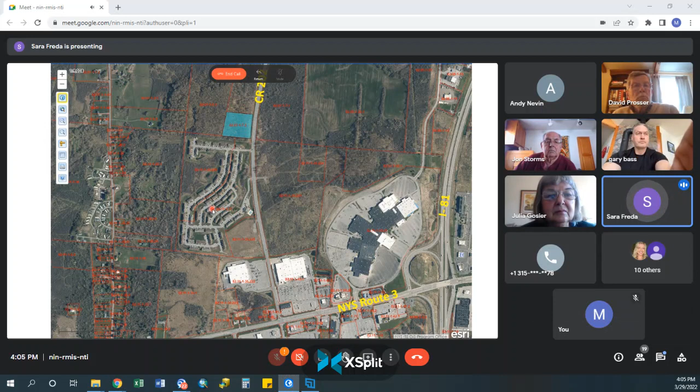Okay, this is a site plan review for a storage facility located on County Route 202 in the Town of Watertown. If you follow my pointer, hopefully it's showing up on that location map. The site is located, here's County Route 202, here's Salmon Run Mall, here's Walmart, Sam's, and Autumn Ridge Apartments. So this site is just north of Autumn Ridge Apartments. The site is zoned neighborhood commercial, which allows storage units with site plan review. And the project is surrounded mostly by vacant land and some multifamily residents, which I just mentioned is Autumn Ridge Apartments. This is the site right here on County Route 202.

I'm on County Route 202, looking west. This is Cedar Way, I think. That's the first street into Autumn Ridge. You can see with the arrow, I'm trying to identify the area where the project site is.

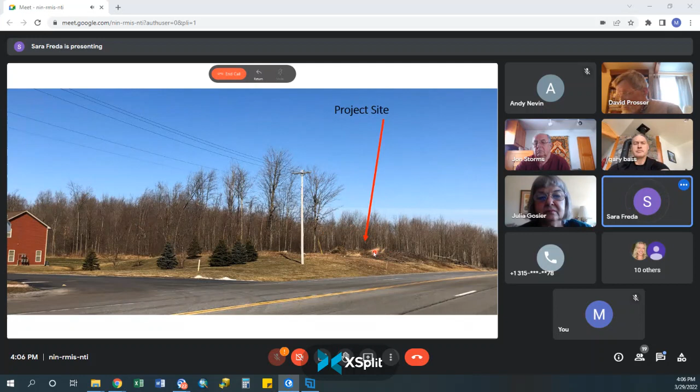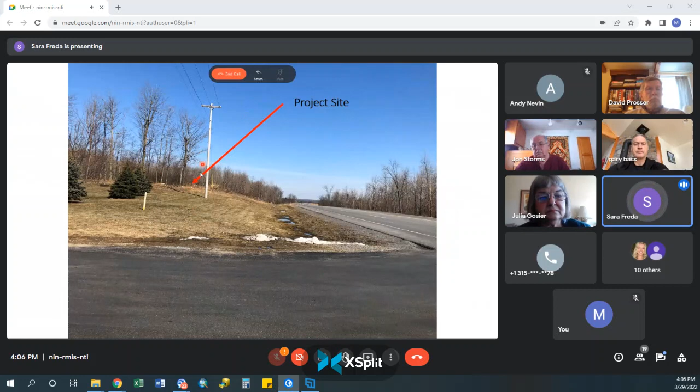It's currently being cleared, the trees are being removed. Here I'm on Cedar Way, which is part of Autumn Ridge. You can see the site is right over here. I'm looking north.

This is the site from 202, looking west. You can see just the tops of the buildings at Autumn Ridge over here, and there's the site, with some of the tree removal they did. This is an existing little bit of a driveway that's here. You can see the driveway better over here, and there's the site right there.

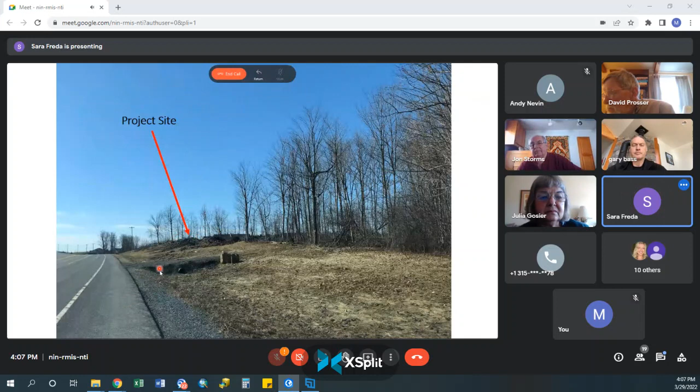I'm looking now towards Autumn Ridge and Sam's Club way back here. This is the little driveway that's there currently. This is Autumn Ridge, you can see they have backyards, a little bit of a slope going upward towards the site.

This is the back of Autumn Ridge. The site is way up here, and Route 202 is way up here. I'm in the back looking to the east.

This is the site plan submitted by the applicant. It shows a driveway access here, a little bit wider than what we usually see. It also shows 3 parking spaces located within the driveway, and another 3 parking spaces over here on the far side of the proposed office building, which is shown here.

These are 3 storage buildings, I believe all similar in size, about 30 feet by 150 feet each, that'd be 4,500 square feet each. Each one of these buildings contains 3 types of units: 12 5-foot by 10-foot units, 13 units on the ends, and 13 10 by 10 units and 13 10 by 20 units.

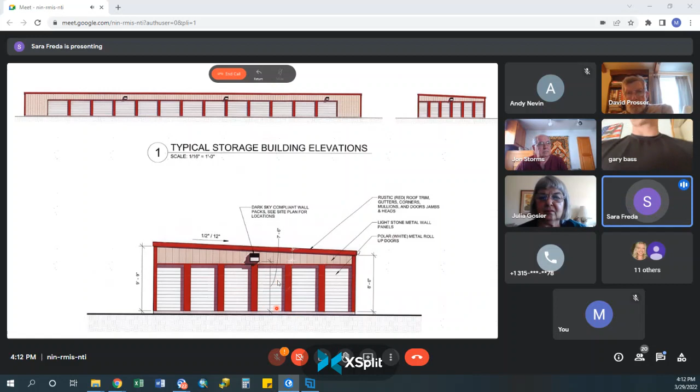These are some colored elevations of the storage units. They look like your typical storage unit that we see around here: red roof, roll-up white doors, and light stone metal panels. This is the warehouse building you'd see towards the rear of the property, and this is the office building you would see in the front of the property.

A Jefferson County building permit will be required, and a stormwater pollution prevention plan is required. The County Highway Department received a request from Nexamp for a commercial driveway permit for access to their easement. Nexamp's submitted plans do not match the site plan for the storage facility. The local board should require the applicant to submit a revised site plan that accurately depicts the access to the proposed project, and a permit from the County Highway Department is required for any driveway, regardless of who is applying for it.

The site plan should address any utility connections or locations of specific septic systems or water hookups. The applicant should address drainage. The local board should ensure that the neighboring parcels and county highway are not impacted.

In the neighborhood commercial zoning district, access points onto a main highway must maintain a 500-foot separation. The local board should consider relocating the driveway or driveways to the center of the site to allow a single access for the entire site, though that might not be possible with Nexamp's plans.

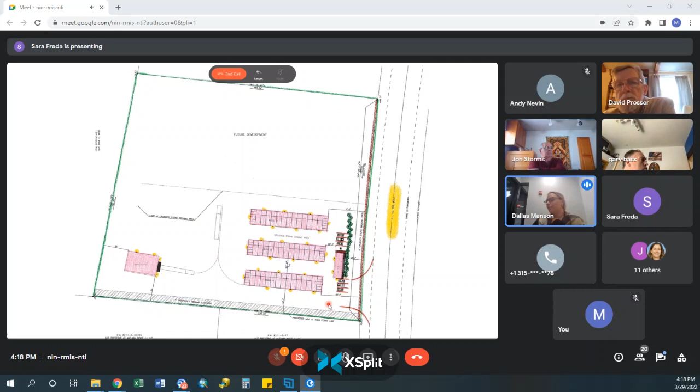So those 3 car parking areas on each side of the office building, they're not going to impede a guy accessing his storage area? No, they're not. I believe there's about 20 feet between the office building and the storage units. There's plenty of room there.

Anybody else with questions or comments? Staff has recommended that this is a project of local concern only, with our comments as stated, to return to the local municipality. Again, staff made recommendations: project of local concern only.

I'll make that motion. Is there a second? I'll second. Charlene seconded. All those in favor? Aye. Any opposed? Okay.

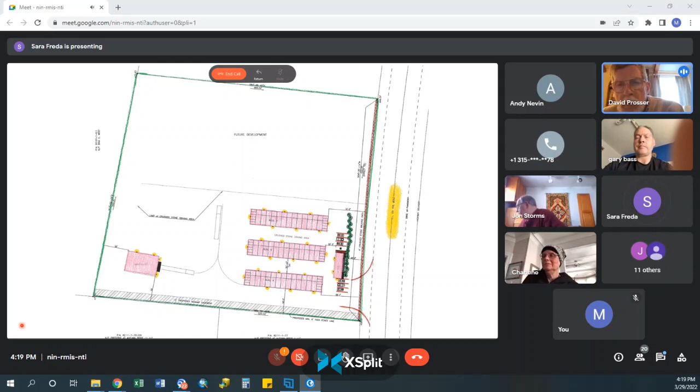That project is going back to the local planning board to address these comments that we've made. Okay, thank you, sir. Thank you.

Okay, who's up next, Andy? I think it'll be the Town of Lyme project, and I'll attempt to grab this and present it.

Okay, so we're in the Town of Lyme, and let me grab the file. That would help.

So the project is on State Route 12E, New York State 12E, just west of 3 Mile Bay, right in here, just beyond Swamp Road. It's proposed by Jeffrey Cohen, or 3 Mile Bay Marina, who is proposing an RV park/campground and marina docking for 16 boats, as well as a boat launch.

Here's the property, I outlined the property. There is a house up here, but they're showing it on a separate parcel from their site plan.

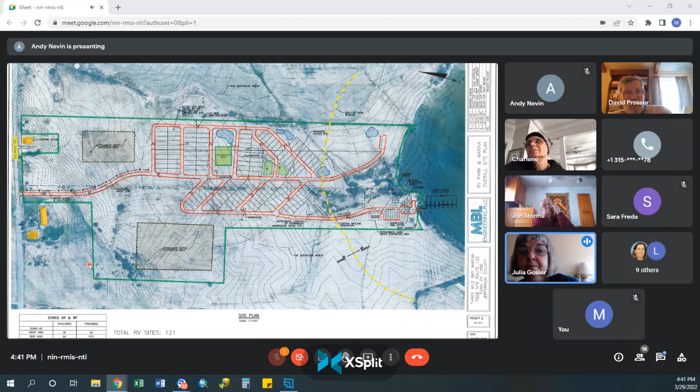Mr. Cohen does have another recreational vehicle park on 179 called the Chameau. It's in a wooded area, so you barely see it from 179. He has recently purchased Sportsman's Hideaway, which is another RV park next door to that one, and he is working on that. But they are such a different scenario because they are pretty much enclosed in woods, so you don't have the effect on the view shed.

Okay, Andy, you had something else to say?

Oh yeah, I forgot to mention earlier, the town did a moratorium on, I think, RV parks and campgrounds for a year. The intent was to develop regulations or address the uses, but various things delayed that process. So the moratorium ended, and I think that's why the project is proposed now. But as I said, they're initiating the update process. This one is coming in now, so I don't know exactly how that'll be affected or not.

I think, between the Department of Health, DOT, and DEC, I would assume that a lot of these issues would have to be addressed and taken care of before the whole operation could start anyway.

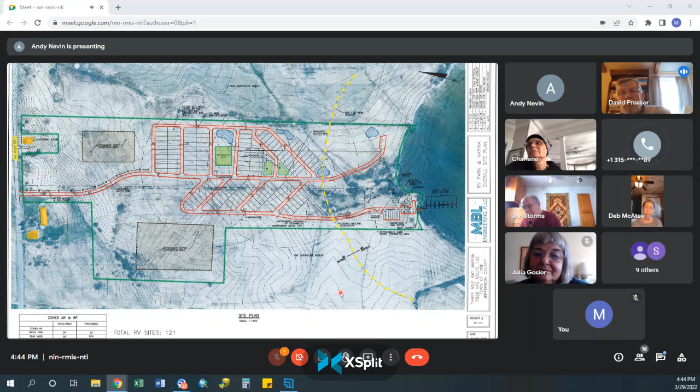I made that motion. Is there a second? I'll second. Deb? Okay, John had his hand up first, we'll get you next time, Deb. Okay, motion's been made and seconded.

All those in favor? Aye. Any opposed? Okay, it's going to go back to your local jurisdictions now, and I hope you can exert your influence that way. Okay, thank you.

Where are we up to now, Andy? I think we're going to go to the town of Hounsfield. We had at least one or two media persons interested in that. Does it make sense to do that one now? All right, okay.

Again, the media may be interested, but okay, go ahead. Wherever you are. Well, Andy, go to it. I mean, we have other people on the call. I'm not aware who they are, there's phone numbers. If it's applicants, I guess they're just going to have to wait because I don't know who's been added lately.

All right, well let's just go in numerical order then for the rest of the projects. We got six more projects to do, let's do them in numerical order. Is that all right? Sure. So the first one up is the town of Alexandria. Yes, yeah.

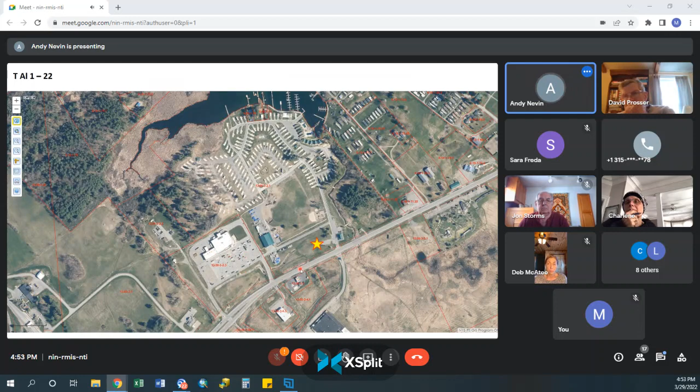So this is Route 12, and this is Price Chopper, and so on, so you're familiar with the area. As you look closer at the site, you've got the entrance. There's a small store there, almost like camping related items in there. The project will be here. This is Dollar General, and this is that gas station just past 81.

So I took a picture last week. These 2 flagpoles are on the site plan, so that's my reference point there. You get an idea—the RV park is back here. There's a playground, and related things to RV parks. This is their main sign, so you've got the big swan or whatever it is. And this is the current entrance road, and they would want to use that same entrance road.

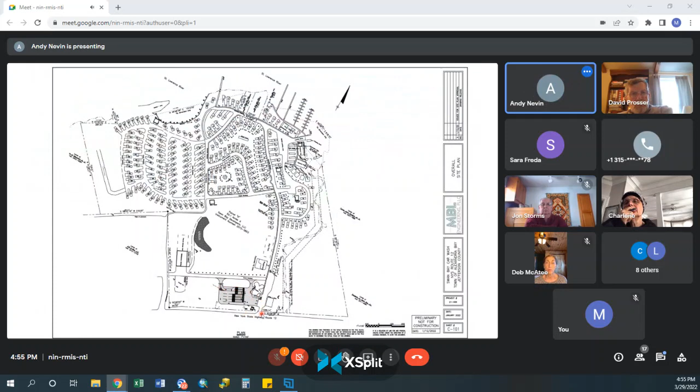And this is that gift shop, whatever you need for camping, type store. This is the overall site plan, just showing the whole park. And then this is the car wash area and that single entrance. So this is a zoomed in site plan on that particular area—we've got the entrance road, that office/store.

Then this is the car wash. So you would enter it from this paved roadway and come in this direction. The car wash exit section is here, the RVs are here, and the pet wash is here. So you can get an idea that the traffic flow really has to come from this direction in order to work, and then they would exit this way.

But as you look at this, the parking for the store is actually on this side of the entrance road. Let me go back to that aerial. So right now, or 2 years ago, this was the parking for the store. Maybe the employees parked in the rear.

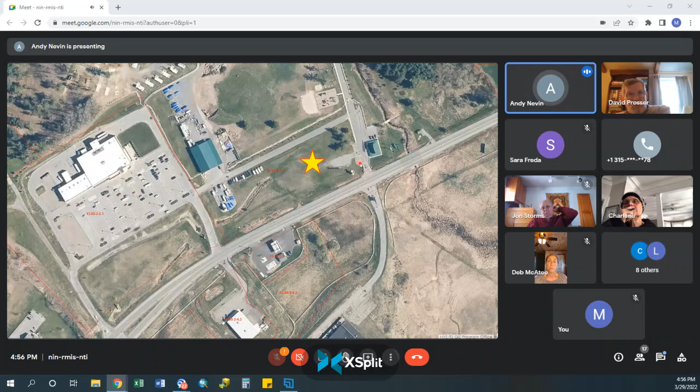We see this location of the parking as being problematic, because with the site plan you're changing the orientation, moving it over, but you're still having to cross RVs or whoever's driving in, even in a wheelchair. This handicap space here, we just think that's not a good idea the way it is. And then you're coming in with RVs and maybe trying to back out and get out of here. I don't know, again we're not traffic engineers, but that was one of the things we noted.

Also, there's existing pine trees. Then those 2 flagpoles are here, and I suppose they're adding a couple more trees here. I forgot to mention the vacuums are back here. So they are going to manage stormwater with some dry swales along here. And then there are some small trees along this paved roadway.

But it's zoned business, so it's allowed.

So I'm going to go over the staff report. The Jefferson County building permit will be required. New York State DOT should be contacted regarding potential drainage impacts along New York State Route 12. They won't review an access point, but the drainage could affect their drainage, so that's where that comment is from.

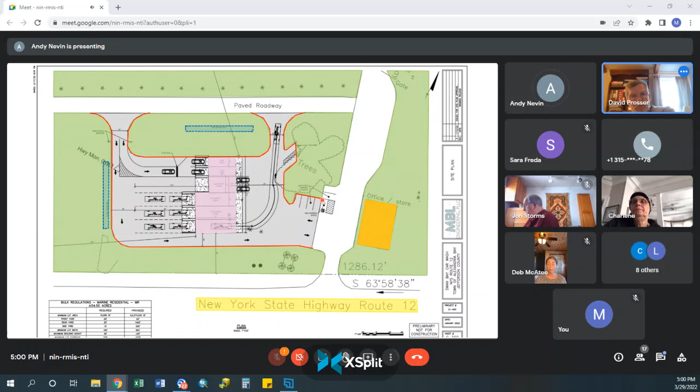Okay, moving on to page 3. So this project is in the village of Clayton. It's a proposal to demolish 2 homes and construct an 80 by 100 foot marina store, so it'd be the French Creek Marina would have their store right on 12 in the village.

It is a site plan review in this zone, which is the marine development zone, and Route 12 is along here. And this is French Creek Marina. As I said, they're taking these houses down to build a store with a storefront on this road. But you can see there are quite a few other homes in the area here, sort of all around the site.

And as I zoom in, you can get a pretty good idea. These are the 2 homes they'll remove.

So these are the 2 homes they're demolishing. Behind is the French Creek Marina buildings. That's one, then you can see there are 2. Now this house will remain, so that will still be a house.

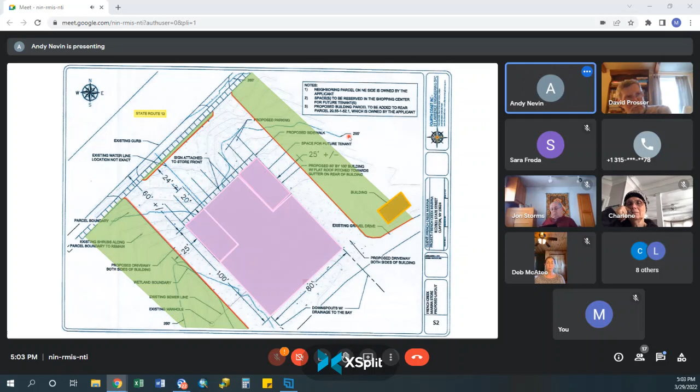So local comments, we were saying that the local board should consider requiring one entrance to be utilized to limit the number of traffic conflict points on State Street. The current grade of the site slopes downward from State Street, so drainage facilities should be provided and reviewed by the village engineer to ensure the neighboring properties in French Creek will not be impacted by any increase in runoff.

Also, they should require landscaping and buffering to be provided on both sides to minimize the visual impact on the adjacent homes.

Small retail service requires one parking space for every 200 square feet of building area, so that would be about 40 spaces. So an area variance may be needed.

Also, any proposed lighting and signage should meet village standards and avoid glare onto the public roadway and nearby residences. Lighting details and a photometric plan should be provided. So that's what I had on it.

Questions, comments? Okay, moving on to page 4. Okay.

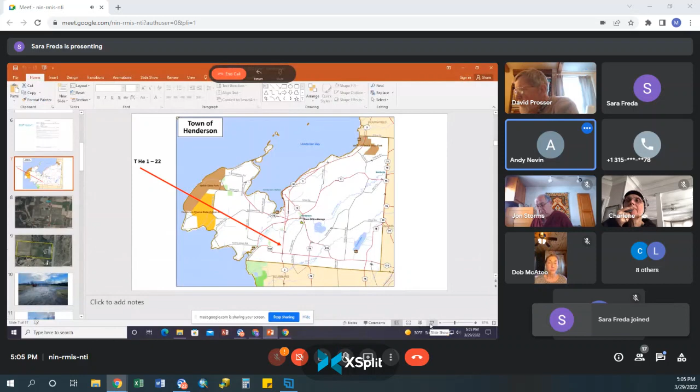What do you see, town of Henderson location map? Okay, here we go. This is site plan review to reopen an existing restaurant in the town of Henderson. The project site is located on 7641 New York State Route 3.

And it's way down here. Sorry, pointer option. Right there. This is New York State Route 3. This is County Route 152. Here's the project site, it used to be a restaurant called Cooper's Landing.

This is Jim's Plumbing, and this is Rhodes Nursery, to get an idea of where we're at here. Pretty much, the site is zoned AR 40, which is agricultural rural zoning, residential zoning. It allows restaurants with site plan review. It's surrounded by rural residential and agricultural uses, and then the Jim's Plumbing office is right here.

This is just a zoomed in picture on it. There's an existing driveway, there's existing parking in the front. This is a fence, this is the restaurant. The septic connects back here, this is a leach field. There's a couple trees. About it.

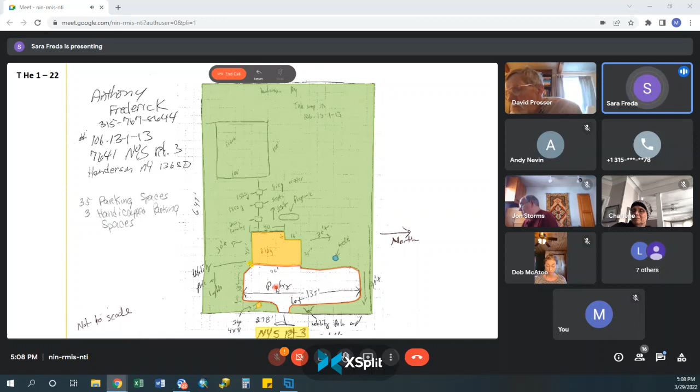For our county and state comments, a highway work permit will be required if any changes are proposed to the existing driveway, though they might not be. New York State Department of Health review is required for the proposed restaurant, and an ag data statement is required since the project site is located within 500 feet of 2 farm operations.

That are in New York State certified ag districts. For local comments, all parking shall conform to the town zoning law, which is 1 space per 100 square feet of eating area. In addition, each space should be depicted on the site plan, and the minimum size for each space is 10 feet by 20 feet. Any questions on that?

Okay, no questions or comments. Moving on to page 5, back to Andy.

So now we're in the town of Hounsfield, and this is proposed by Convalt Energy. They're proposing a solar manufacturing plant for solar panels, 330,000 square feet, located in the airport business park right next to the airport, on New York State Route 12F.

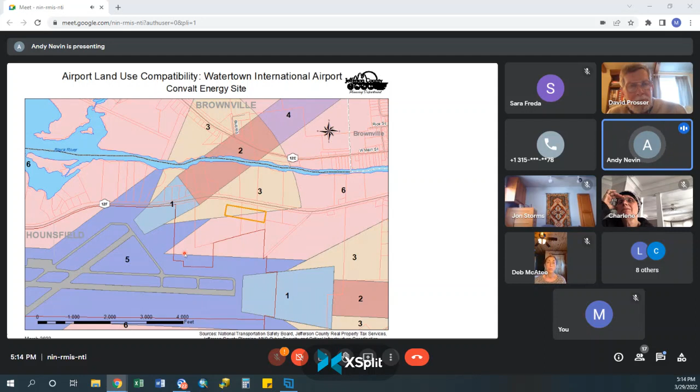They seem to be a lot brighter. So it looks like they're taking the airport into account, but lighting is another issue—if it's too bright near the runway, the pilot has a hard time with the visual aspect of landing. We have visual runway approach procedures at our airport, so bright lights are another thing you want to avoid.

I'm just going to keep going. So this is the appearance of the building from the north—this is what you're going to see from Route 12F. Just a number of windows and a few doors and overhead doors.

These accesses are for equipment maintenance and also fire exits and things like that, connecting to those gravel roads. This is the west elevation where the loading docks will be, and you can see it's a 2-story building.

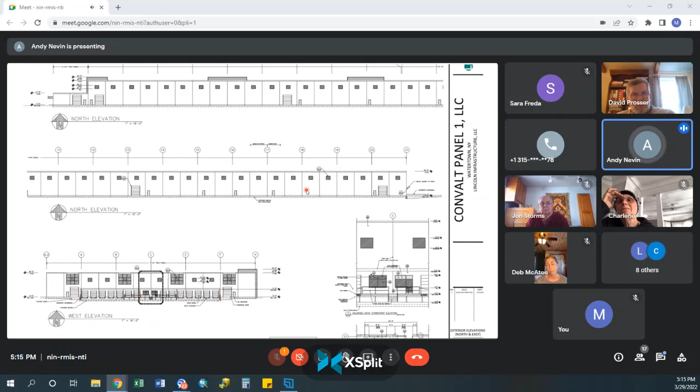I think it's 35 feet high. Then to the south, there are some partial elevations here just to demonstrate the doors and some of the glass atriums and so on.

Then this one is the south elevation, so this will face that runway, this building here, how it looks like that, and this one. These would fit together if you had a bigger screen. And then this is the east elevation where the parking lot is and the main entrance and so on, just to give you an idea what the building looks like.

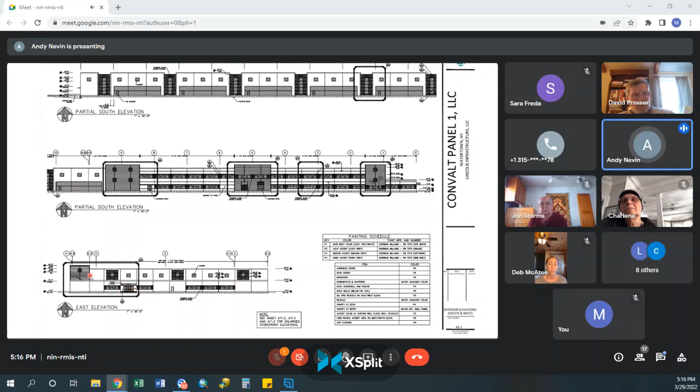Some other things they submitted: they did submit a traffic study that was completed in 2017 for the overall business park idea. They studied, or estimated, traffic levels based on 6 or 7 small buildings and the employees, and looked at the impacts on all the intersections in the area and how their level of service would either not be degraded or if they would be. It was a fairly thorough traffic study, so they submitted that for this.

I didn't see where they amended it to include discussions about this particular use and number of employees and so on. It seemed like the numbers they had were greater than what this might generate, but obviously I'm not a traffic engineer and I wouldn't be able to make that call. Somebody with better credentials would want to look at that and make sure, and I assume DOT will be doing that.

They also submitted a SWPPP, which is the Stormwater Pollution Prevention Plan. They did a SEQR, and the town is coordinating the coordinated review with SEQR. And so the airport commented on

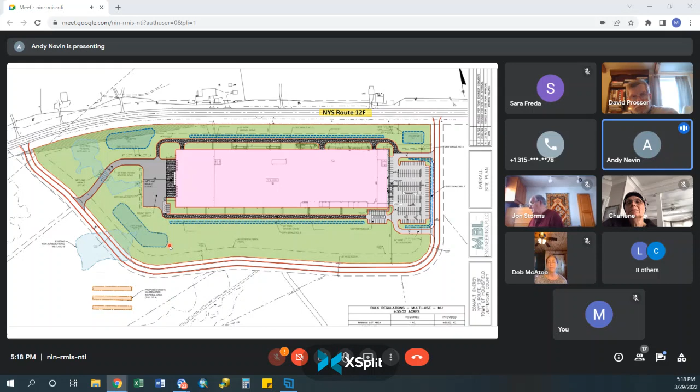So the land use compatibility with the airport — with SEQR, they're looking at those things and commenting that they should be addressed. And then we'll do the same thing just to be thorough about our county aspect of issues. So are there any questions so far, or should I go through the issues?

No, go through them and the way they are. All right. Also, I didn't realize that you got a different recommendation for this project as approval, so finish up your comments and then we'll have to vote on this one separately.

Okay, yes. So county state issue: the first one was, due to the close proximity of the Watertown International Airport and both its runways, airport compatibility should be taken into account. The FAA, which is the Federal Aviation Administration, has recommendations regarding outdoor lighting, wildlife attractants such as retention areas or ponds, land use compatibility, structure heights, and crane use during construction are some of the considerations.

Also, a New York State DOT highway work permit is required for the proposed road entrances onto Route 12F. A traffic study with the original business park design was submitted; it should be determined whether the proposed project scope will be within the parameters discussed in the traffic study. Also, a Jefferson County building permit will be required, and a U.S. Army Corps of Engineers permit has been applied for regarding the wetland disturbances.

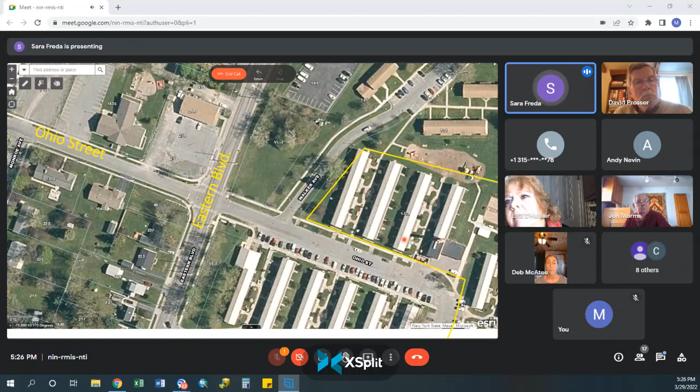Here it's zoomed out a little. You can again see Ohio Street comes to an end here. These are all the East Hill Apartments. This apartment building right here is building number 9, and where the star is, is where the development is going to be. So it's a request to reduce the street side setback, the front side setbacks to the street.

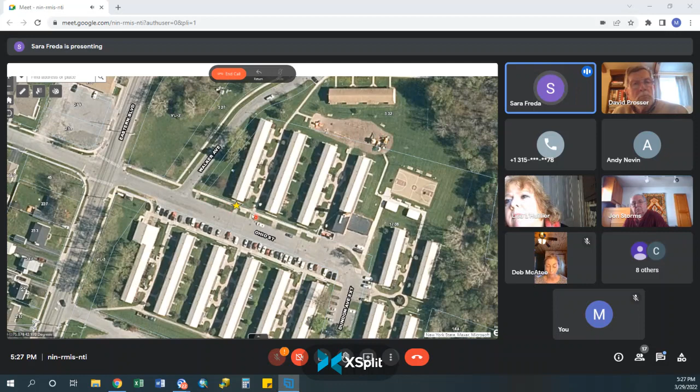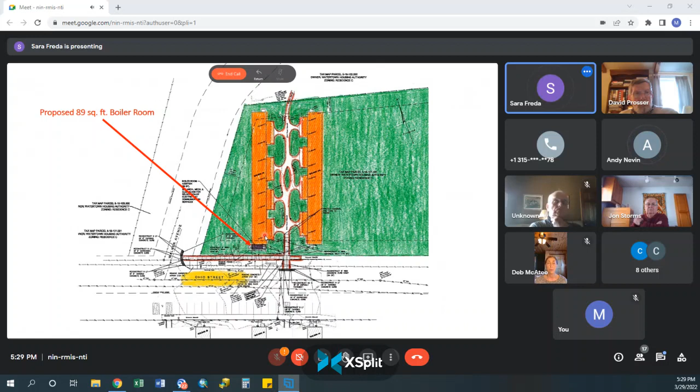In terms of area variances, we have our standard comment that the local board should consider the benefit to the applicant as weighed against the detriment to health, safety, and welfare of the community, using the 5 factors for an area variance as stated in New York State city law. Any questions on that one? Okay.

Okay, so all right, you're going to make a motion, you'd want to include all those other ones with the exception of Convolt. Yeah, I'm going to make a motion that this applies to projects 1, 2, 3, 4, and 8.

We have previously done 5, 6, and 7. So I'll make a motion that these are actions of local concern only, together with our comments to be returned to the applicant as appropriate. I'll second. Lisa, second. All those in favor? Aye. Any opposed? Okay, carried.

Okay, we're getting to you in just a minute here, Lisa, but we got one financial thing right away here. Andy, you all set with us? Yes, one more thing. Okay, so I'm going to talk about the St.